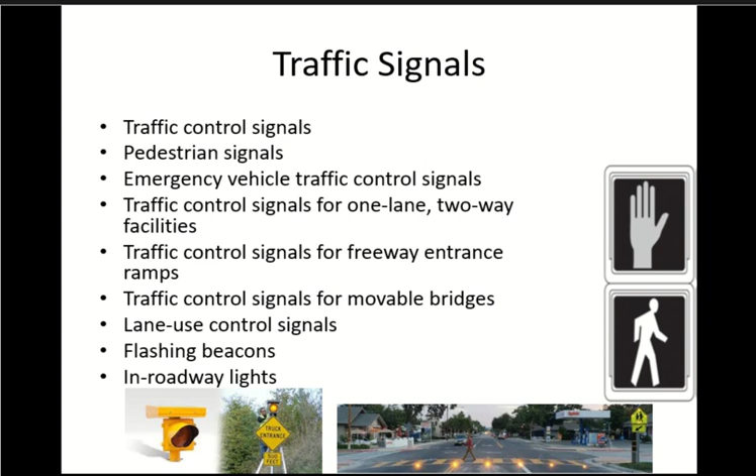So two very important points about traffic signals. If you decide on an intersection we will have traffic signals, then the signals should remain operational throughout the time. You cannot switch off the signal. Okay, no signals should be switched off because it will confuse the drivers. They don't know what to expect when they come next time on the intersection. Okay, so to avoid confusion, we don't switch off the signals. Unfortunately, in Karachi they do. That's why we are always confused.

Okay. Second thing is, no other sign should be used with the signal. No other road sign should be used with the signal. The most important, the most critical case is using a stop sign. Because the signal could be green and then you still have a stop sign. A green signal and there's a stop sign. Again, confusion, right? So these points indicate that the signal should not cause any confusion because of their operation or because of anything else you are using with the signal.

There are some advantages of having a signal. The first advantage is if you have an intersection and you have very high volume, the signal is the only control device which can handle high volume. Okay, so signal is the most appropriate device for high volume intersections. What about roundabouts? At high volume you shouldn't.

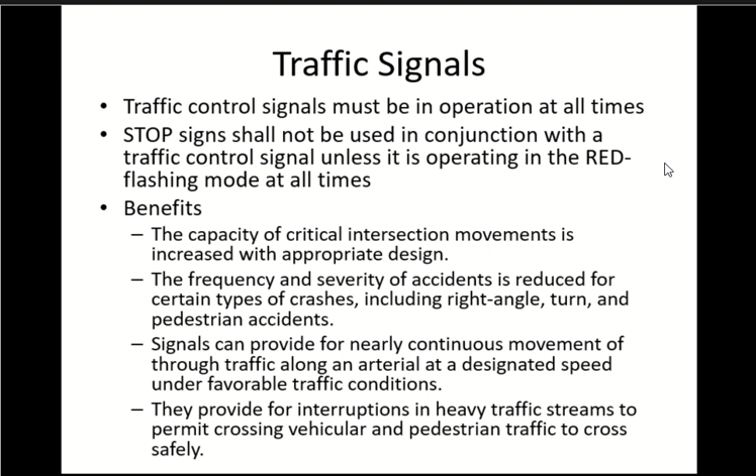So either you will keep on waiting, or if you become impatient, you will take your chance: with a smaller gap, let me go. Then it is a matter of life and death, right? Okay, not so. But anyways, you will take a chance which will not be safe. But with signals, the signal will provide you the gap, a safe gap, enough for you to move. Clear? So there is no chance-taking on your behalf, like let me decide when to go. No. The signal will stop the heavy traffic, and it will give you a safe chance to pass. So these are the advantages of the signals.

Then we have signal indications. We know the signal indications, we call them lights. They are calling them balls because of their shape. So if you take out the light, it's actually a ball, a full ball. It's not circular only on the outside. It's a complete sphere. If you don't trust me, you can go and check.

Huh? Sure? Okay. We will see after the exam. They're going to ask us if it's a circle. No, I will not ask you, but your trust is up till the date of the exam, right? After the exam: because this was wrong, how can I get this much? Why did we get these marks, and so on.

Anyways. So we know we have green light, yellow light, red light: green ball, yellow ball, red ball. We know about them. Yellow is supposed to mean what? Get ready. And this is when yellow happens after red, right? This is a yellow after red: get ready. And the other one? Slow down. Everybody agrees, right? Slow down. So do it. Keep it in your mind. Write it on the front screen of the car. Slow down. So there are two yellows, one after the green and one before the green, right?

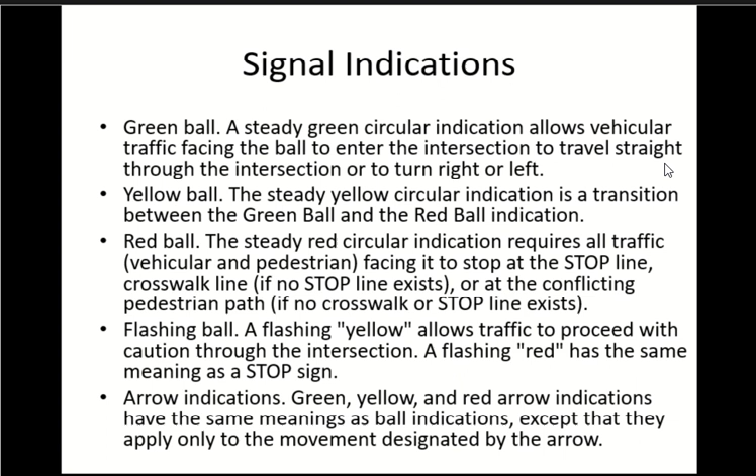So you see when the signal becomes green, it has an arrow inside it, right? So it shows a straight arrow or a left arrow. So you know that this signal is only for this movement. If you have straight arrow green, that means only straight can go. And then you see a left arrow which is red, that means the left is stop. Okay, so arrow indications for specific movements.

Sight distance for the signals depending upon the speed. 85th percentile speed. This is a very important value for us. I mentioned it in the spot speed topic as well as the cover time topic. So you can see when the speed increases, the sight distance also increases. More speed, you need more time to stop, right? So I should see the signal with more distance. Okay, clear?

Now if the sight distance is not enough, how do we increase the sight distance? So I designed the road, my road has an 85th percentile speed of, let's say, 60 miles per hour, but my sight distance is not 715. What can I do to increase the sight distance? Distance is larger, I don't have any problem. Distance is less, add more warnings before. You can add a warning, the signal after so many meters or so many feet. Anything else to increase the sight distance?

Larger signs? We're talking about a signal, right? So you can add a warning sign, that's done. But what can I do with the signal to increase the sight distance? Make it higher. Anything else? Speed ramps, speed bumps, okay. So I reduce the speed. What else?

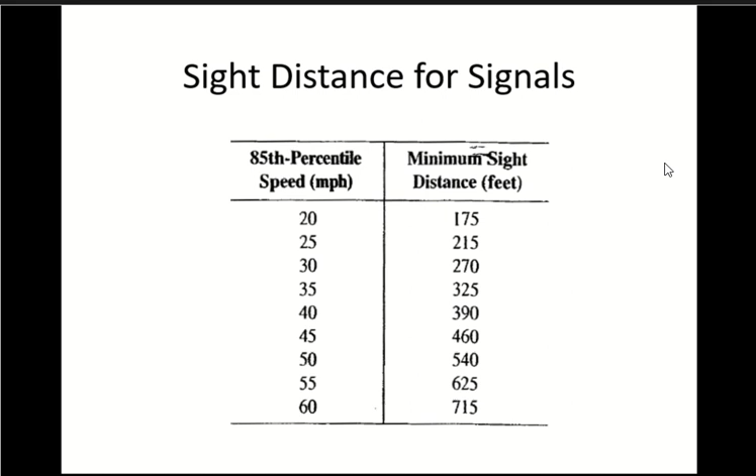You may have seen sometimes we change the orientation of the signal, vertical to horizontal, and then we put it on top of the road instead of on the side. So all these things can improve the sight distance. Position of the signal, height of the signal, putting a warning sign, putting a speed hump. All these are helpful to make sure the driver can see the signal with enough distance to stop.

Signal components, we are talking about the signal timing now. We have already mentioned cycle in some of the previous topics. What is the signal cycle? From green to green, basically when the signal completes all the lights, we call it a cycle. Cycle length is the time taken by the signal. So it's a time, but we call it length.

That's how people get low grades in traffic. Otherwise, it's very easy. You just do these things to make sure you get confused. Okay? You are here or somewhere else? Okay.

So cycle length means the time which is taken for the signal to complete the cycle. Within one cycle we have different intervals. What is an interval? The portion of time in which the signal light doesn't change. The signal became green, it's green interval. Signal became yellow, yellow interval. When it changes from yellow to something else, the interval will end. So an interval is the time in which the signal indication doesn't change.

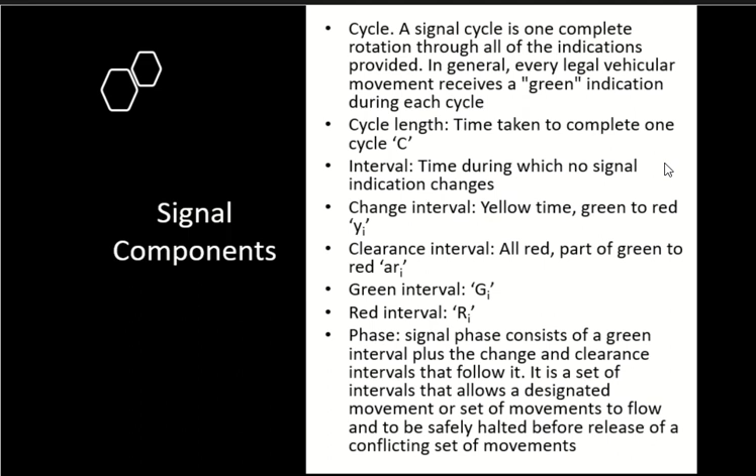Signal can be operated in three ways. There are three ways to operate a signal. The first one is pre-timed. In pre-timed, the timing of the signal is set at the design stage. The yellow time, the green time, all the intervals and phases are set at the design stage, and it doesn't change during the operation of the signal. Signal is installed, it will work according to the time which you have already fixed.

Okay? Clear? As a design engineer, as a traffic engineer, you should know that traffic keeps on changing. It goes higher in one direction, then lower at some other time, and the other direction may follow reverse. So it's your duty to make sure that in different timings the signal has enough time to accommodate the movement. So you know in the morning north side has higher volume, so you will design the timing with more time for the north side in the morning.

In the evening, you know south side has higher volume, so you design the time with more timing on the south side in the evening. Okay, but everything is the responsibility of the design engineer. He will fix the time, and according to the time, signal will keep on working.

Clear? Okay. Another type of operation is semi-actuated. We have used the word actuated earlier as well. Actuated means working with a sensor, connected with a sensor. So we have semi-actuated and we have fully actuated. Semi-actuated means what? We have intersection of a major road with a minor road. One of them has a sensor which is connected to the signal.

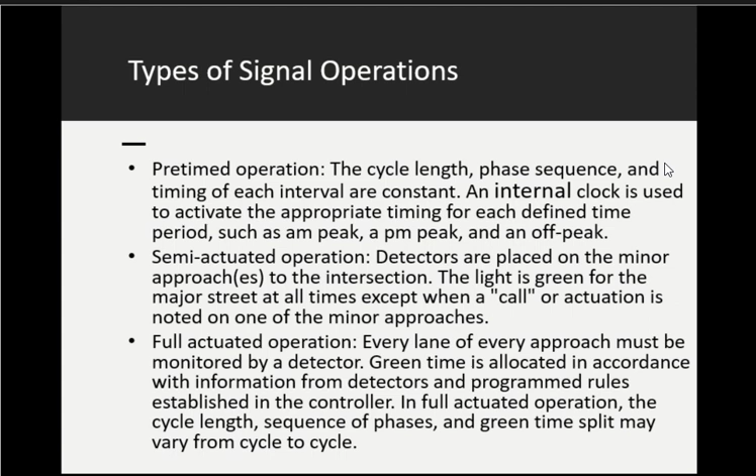Fully actuated is always on the intersection of two major roads. Okay. We have examples for all these in Bahrain as well. Then we have signal coordination, which I already mentioned, right? Meaning what? Huh?

No, signal coordination. So you have a series of intersections which are close to each other. So you fix the timing of the signal in such a way that the cars keep on finding green when they move. Okay, this is called signal coordination. Clear? Okay. But it will happen when you have signals which are closer to each other. If signals are 2-3 kilometers from each other, this will not work. You can do it, but it will not work, because of the variation.

Okay. Now, to make signal coordination work, I have to fix an interval between the green of the first signal and the green of the next one, right? I have to fix an interval. So this one will become green at 0 seconds. The next one will become green after X seconds. So this X is called the offset. Okay. So how do I calculate the offset? After how much time should the next one become green?

It depends upon speed and distance. If you know the speed and you know the distance, then you know when to make the other signal green. Okay. So that time is known as an offset. Clear? Okay. One more restriction with coordinated signals. All signals which are coordinated with each other should have the same cycle length. So the total time of one cycle for each signal should be the same as the other ones. Otherwise it will not work.

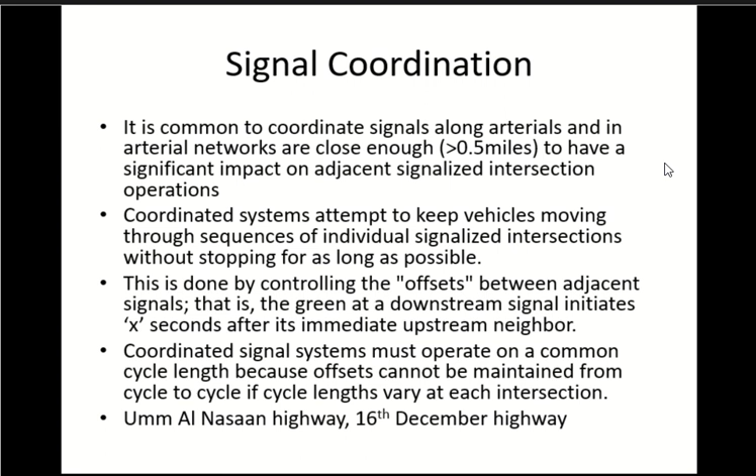And in some cases, like the 16 December highway, when there's rush time, school time, your speed is like 10-20 kilometers per hour. They designed the coordination for 50-60 kilometers per hour. So obviously you are going slower. When you reach the signal, you are late; it was green, now it has become red. So we can do coordination, but it's not a guarantee it will work every time, because of the volume and the other conditions.

Okay, saturation, headway and flow rate, two very important terms for signal design. What do we mean by headway? What is headway? Space? Time, yes. It's the time between two vehicles. Okay, and what is flow rate? Say again. Flow is less than 1 hour, and flow rate is turned into 1 hour. Okay, flow turned into 1 hour, that is flow rate.

Saturation means what? Maximum. Saturation flow rate means maximum flow rate. If the flow rate is maximum, the headway is minimum. For maximum flow rate, the headway should be minimum. So when I say saturation flow rate, I am saying maximum flow rate. When I say saturation headway, I am saying minimum headway. Clear? The equation between them you can see on the board here. S is the saturation flow rate, H is the minimum headway.

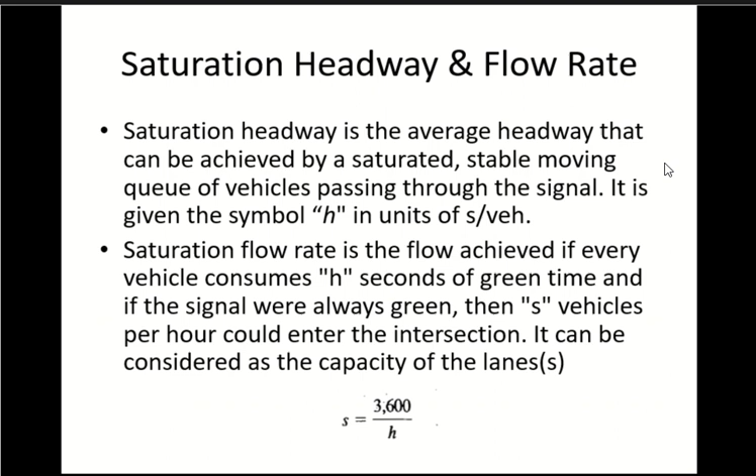Clear? Once we have the headway, you can find out saturation flow rate. Any questions? The extra headway which is taken by the first 3-4 vehicles, you can see in the graph, is denoted by delta. Extra means more than the saturation value, more than the minimum value. The minimum is 2. So any headway above 2 is delta.

So you will have some delta in the first 2 cars, some delta in the next 2 cars, some delta in the next 2 cars. If you add all these deltas together, it becomes startup loss time, L1. What is L1? The summation of the extra headways taken by the first 3 or 4 initial cars of the queue is startup loss time.

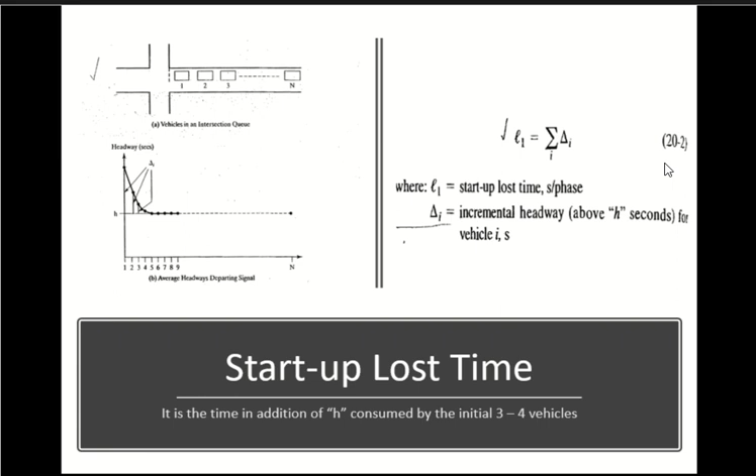Saturation flow rate. In every phase we have 2 loss times. What is the phase? Green, yellow and all red. Yes. Green, yellow and all red is one phase. So in this whole time, there are 2 types of loss times, L1 and L2. What was L1? Startup loss time. L2 is clearance loss time.

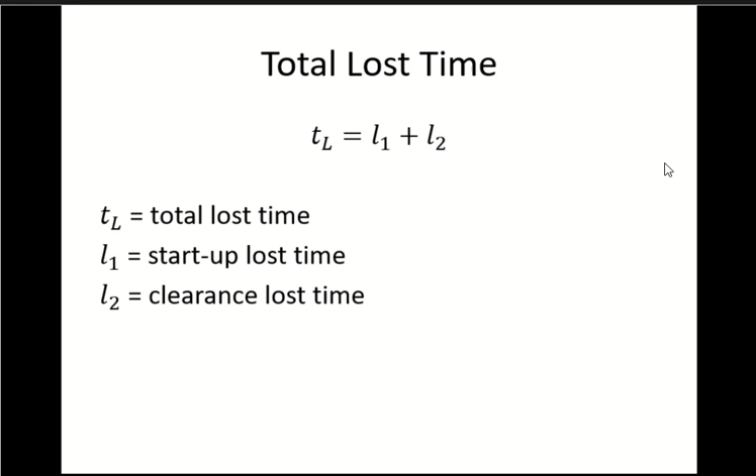Clearance loss time. What is another name for clearance? All red. So all red is also called clearance, and that is the loss time. So every phase has startup loss time when the signal just turns green, and when the signal becomes red, it has clearance loss time.

Signal has 2 types of green: actual green and effective green. Capital G is actual green, when you see the green light. Anybody with a stopwatch can measure actual green, see for how many seconds the signal was green. Then we have effective green. You can see the equation of effective green over here.

So effective green is a portion of the phase in which vehicles are moving at saturation headway. The headway between them is the saturation minimum. That portion of the phase is known as effective green. How do I calculate it? What was capital G?

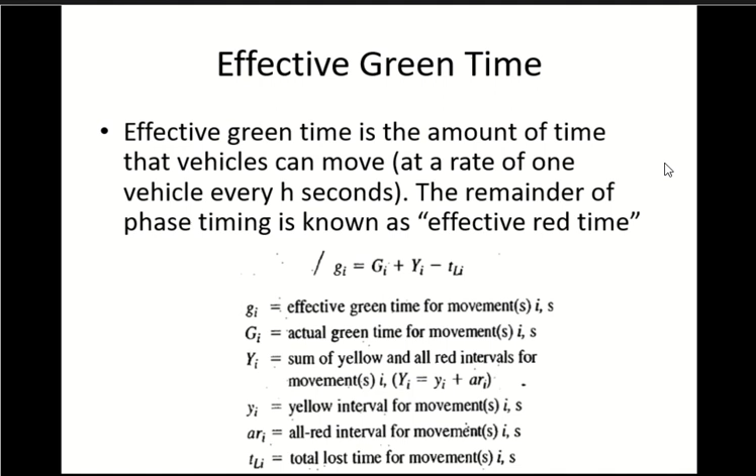Actual green. What is TL? I showed in the last slide. What is TL? Total lost time. Okay. What is capital Y? Capital Y is yellow plus all red. If it is only yellow, it is small y. Capital Y is yellow and all red both. Clear? Any question? Okay.

We have one example. We have an approach on a signalized intersection, and the data for that signal is given here. Total length of the cycle 60 seconds. Actual green time is 27. Yellow plus all red, capital Y, 4 seconds. Saturation headway 2.4 seconds. Startup lost time is given, clearance lost time is given. What is the capacity for this movement?

To find out the capacity, there are two methods. The first method uses the saturation headway. The second method uses the saturation flow rate. Now I'm talking about the first method, where I will use saturation headway. In the first method, I should know how many cycles I have in 1 hour. So I calculate I have 60 cycles in 1 hour.

How do I know I have 60 cycles in 1 hour? Because each cycle takes 60 seconds, so in 1 hour you can have 60 cycles. 3600 upon 60. Clear or not? Number of cycles: 1 hour upon cycle length, which is 60. Clear?

Then I will calculate effective green. Effective green was actual green, which is given 27 seconds, plus yellow and all red, given 4 seconds, minus lost time. We have startup lost time and clearance lost time, both 2 and 2. So 27 plus 4 minus 2 and 2. So the answer is still 27. Plus 4 minus 4.

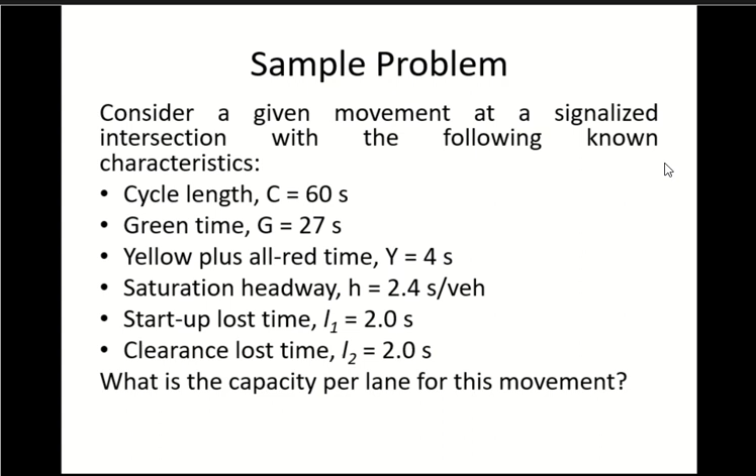So the interval between the vehicles in these 1620 seconds is 2.4 seconds. Saturation headway is given, 2.4 seconds. So during effective green, the interval between each vehicle is 2.4 seconds per vehicle. And total available is 1620 seconds. The total time divided by headway gives you the flow. This is the capacity.

So first, how many cycles you have. Then how much effective green in one cycle. Then how much effective green in the whole hour. And divide by the interval gives you number of vehicles in 1 hour. Clear? Any questions? Next method. Yes. Effective green in 1 hour. Any other question? Okay.

Next method, we will use saturation flow rate. First, I will calculate the G by C ratio: effective green upon cycle length. Effective green you calculated already, 27. Cycle length given 60 seconds. So G by C ratio is 0.45. 3600 divided by 2.4 gives you saturation flow rate. What is 2.4? Saturation headway. 3600 upon saturation headway gives you saturation flow rate.

What is saturation flow rate? Maximum flow rate without interruption, right? So the saturation headway gives me a flow rate of 1500, but this is not the capacity because my signal has interruptions. Without interruption, the entire cycle length will be green, so this ratio will be 1. Is it 1? No. So my actual capacity is the ideal value with full green multiplied by the portion of green I have, which gives me the same value.